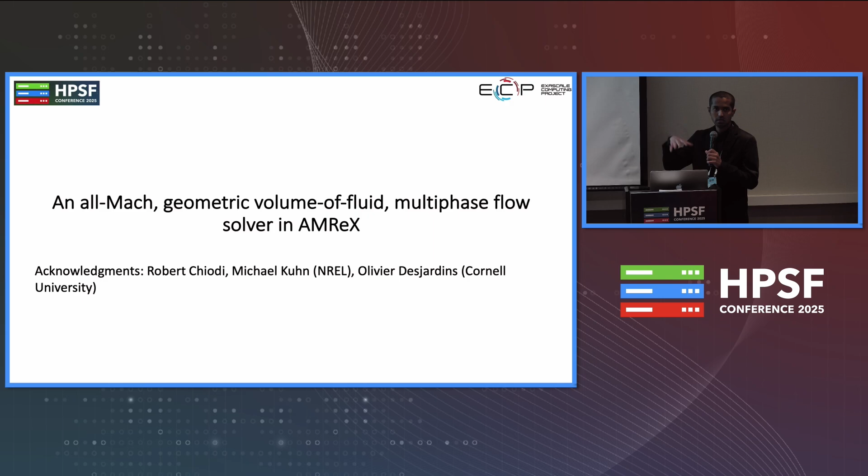So in this part, the numerical methods that you're going to see are not developed by me. It was already existing in their single mesh code framework called NGA. So my work was to interface that code framework into the data structures of AMReX.

So coming to the governing equations, the algorithm used an unsplit geometric VOF, volume of fluid. So geometric means that wherever there is a liquid-gas interface, we create a single plane, very similar to what we have in EB in AMReX, and that is advected passively with the velocity field.

So you have one equation for the volume of fluid transport, which is the first one, and then you have 5 equations for the gas and 5 equations for the liquid. So totally 11 equations are being solved, and we have a stiffened gas equation of state to account for the multiphase nature.

And the interface reconstruction, I'm not going to the details, but it's done through something called PLIC, which stands for piecewise linear interface calculation. So there is a way of determining the normal to the plane by a least squares error reduction method, and that's how you determine the interface.

And we have an all-Mach algorithm, which means that it is going to work on all ranges of Mach number, and it is in the same spirit as any incompressible flow algorithm, in the way that when you do the advection, you do not have the pressure term, and then you bring back the pressure term with a projection step.

And as opposed to an incompressible flow where you have a Poisson equation, you would have a Helmholtz equation for pressure in this case, because the pressure also has a time derivative term. And if you divide by the speed of sound, denoted by c, and make it go to infinity, which is the incompressible limit, you will recover the standard Poisson equation for pressure. And then you have a correction step very similar to incompressible flows.

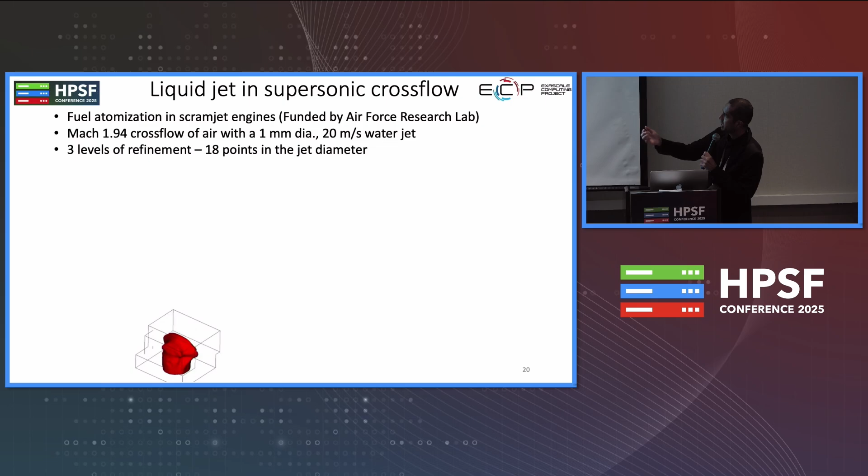So here what you're seeing is there is a Mach 1.94 crossflow of air going from left to right. And there is a fuel jet at 20 meters per second. It's a water jet, so the density ratio is 1:1000. And it's 1 millimeter diameter. And there are 3 levels of refinement above the base level. So that gives about 18 points in the jet diameter.

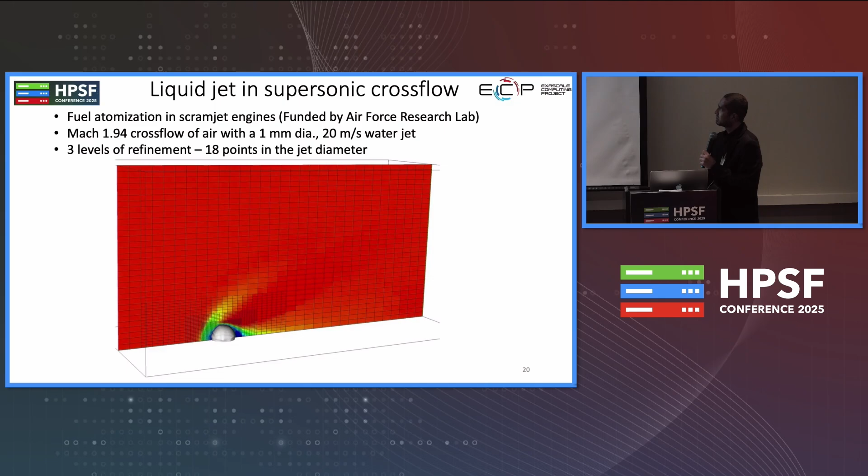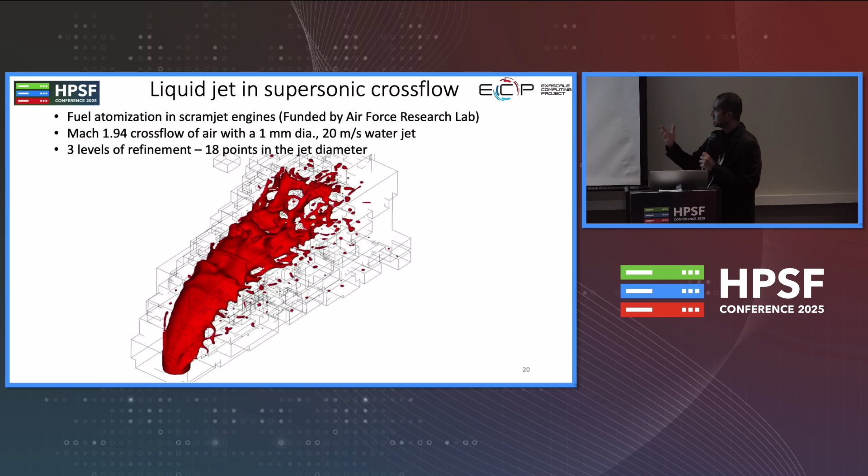I do not have any quantitative comparisons or anything. These are more like qualitative. And it's just to see that the simulation runs in a stable manner. So as you can see, the refinement was based on the interfaces. So wherever there is an interface, I tag them for refinement. And the boxes show the finest level of refinement.

It's also customary to render these simulations in Blender. So here what you are seeing are the actual interface planes. Those planes are exported as STL formats from VisIt, which can be read in Blender and visualized. There's not much scientific value. It's just a nice simulation.

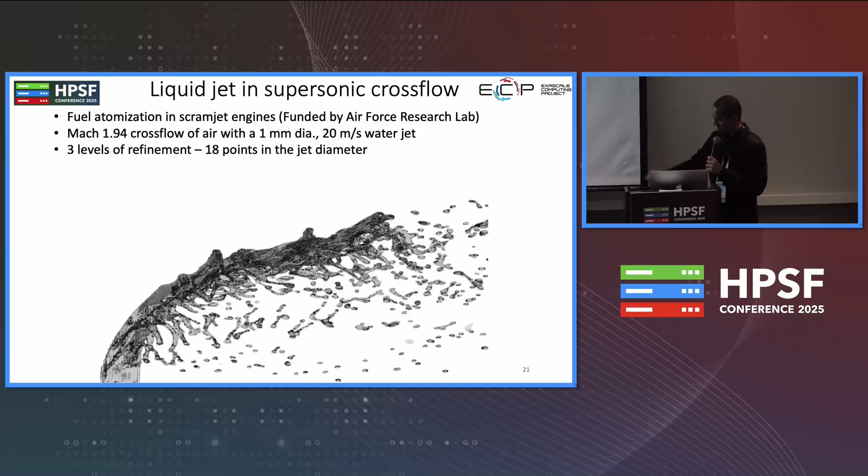The other project that we had was funded by the Office of Naval Research, in which they were looking at atomization using acoustic waves. So they had transverse acoustic waves that create a standing wave pattern when they come from both the left and the right, and they atomize the liquid.

When the liquid jet is aligned with the PAN, although it is a maximum pressure, you do not have any gradient there, and so it might lead to thinning of the jet, but it does not lead to atomization. So you always need some sort of an asymmetry, like what you have at IAN or the velocity antinode. The velocity antinode is having a more symmetric pattern, whereas the intensity antinode has a sort of a bias in atomization towards one side.

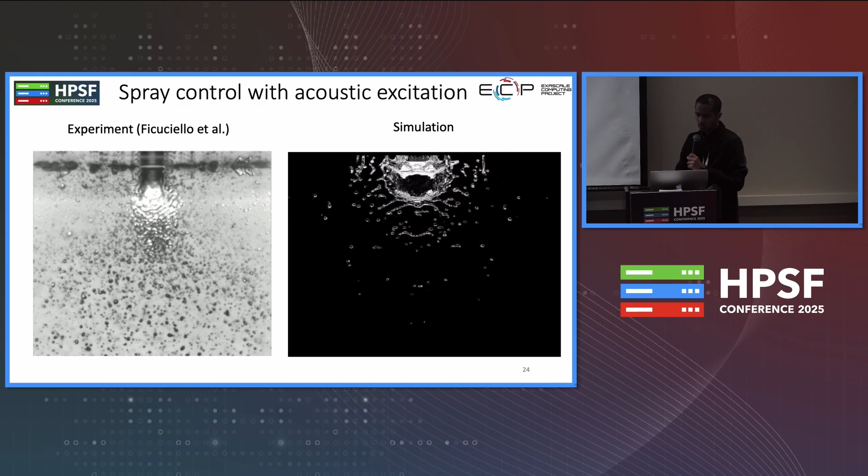And this is another view of the simulation. Again, all qualitative comparisons with the experiment on the left and the simulation rendered in Blender on the right. And this shows a view of the finest level of refinement; there were 3 levels of refinement above the base level.

We also did some studies of scalability of bubble collapse in supersonic flow on the Stampede, now obsolete Knights Landing nodes. And it was a decent scaling with AMR, and the resource usage was reduced by about 50% with adaptive mesh refinement of 3 levels with a 64 cube mesh.

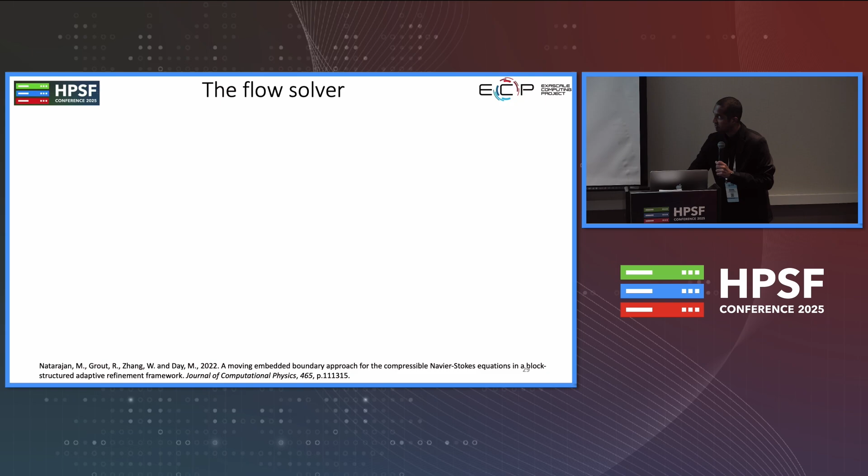And the next part is the work I did at NREL, thanks to my co-authors, Ray, Weiqun, and Marc. And this is on implementation of a moving embedded boundary algorithm within the CNS framework, which is the Compressible Navier-Stokes framework in AMReX. So the CNS framework has an existing capability of doing simulations with compressible flow and static bodies. So that was extended to doing moving geometries.

And it has a Godunov-based semi-analytic Riemann solver with van Leer limiting of the fluxes. It has second-order accuracy, and the small cell issue was treated with the flux redistribution technique. And because this is an explicit solver, it does not have the issues that Deepak was mentioning in the morning related to solver convergence, like the nodal Poisson convergence or anything of that sort.

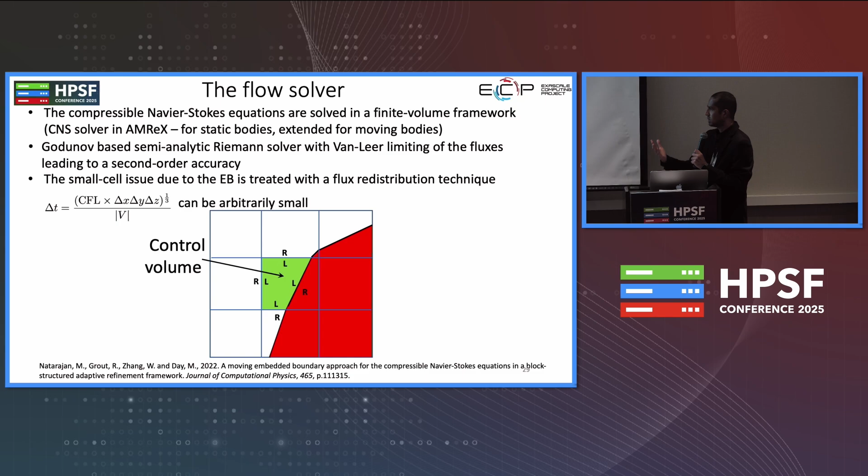So here, I'm not going into the details of how the fluxes were formed, but the idea is that at every face, even at the EB face, you have a left state and a right state, and that's given to a Riemann solver, and that returns you the fluxes at the EB face. So to do a moving EB, the state inside the EB was modified in a certain way so as to account for the moving boundary condition.

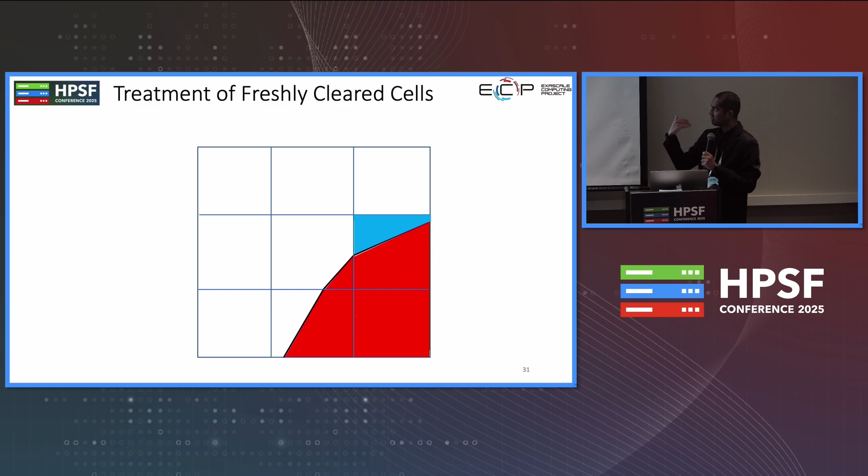And one main thing that has to be handled is what are called freshly cleared cells, which means that when an EB is moving, you have cells which were previously solid and suddenly they become a cut cell or a fluid cell, which does not have any history of fluid data. So you have to do some sort of an interpolation. So we do interpolation from the valid cells, which are the cut cells or the fluid cells, in a 3x3 neighborhood, and it is a volume weighted average.

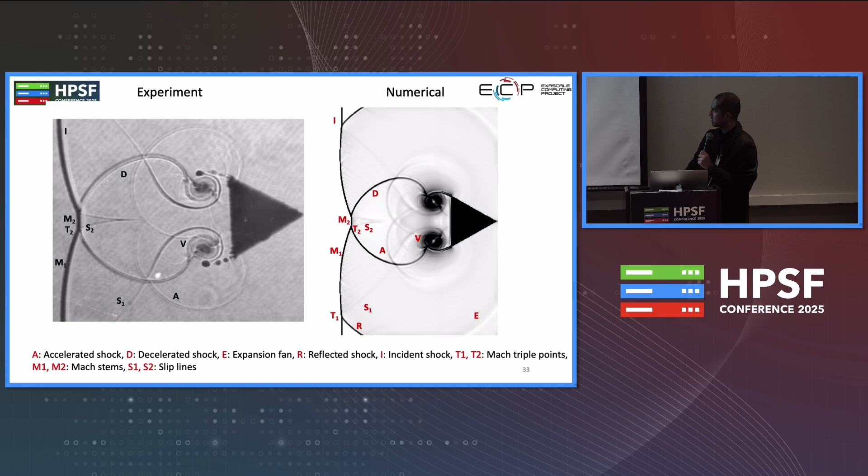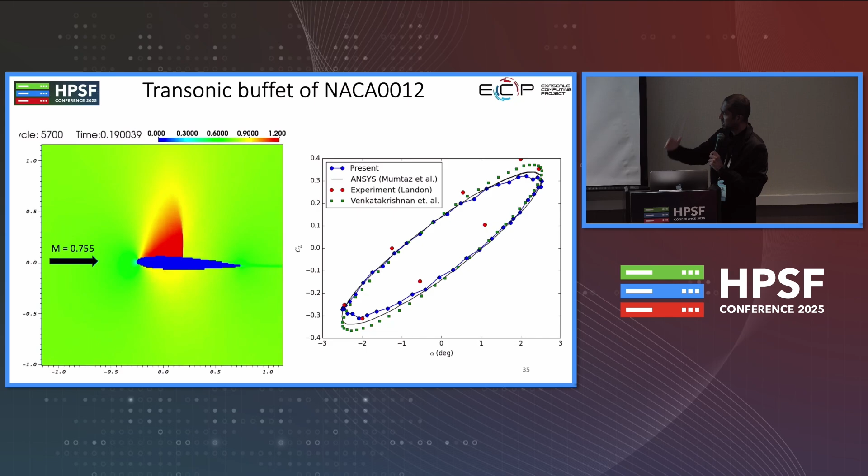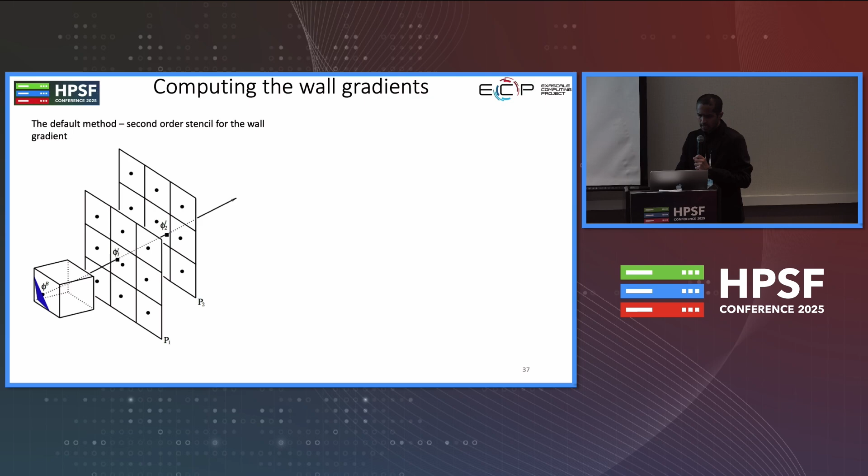And another thing that we had done was to implement a better method for computing the viscous gradients on the surface of the EB. The classic method consists of a 3-point method to find the gradients along a line normal to the EB, and we replaced that with a 3rd-order least squares method, which is also now there in AMReX Hydro.

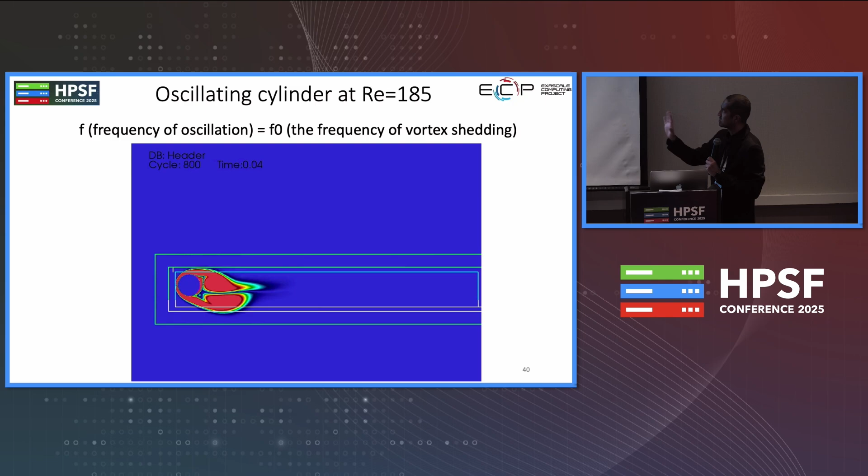To do this, I had an implementation of that within the CNS solver, which used LAPACK to solve the 9x9 matrix system, and it's a pointwise matrix system, so that's pretty fast. And we did a bunch of test cases to verify that.

So this is one of the cases where there is an oscillating cylinder with a frequency of oscillation the same as the vortex shedding frequency, and we have some comparisons of the coefficient of pressure with some experimental data, which is shown in symbols, and also the skin friction coefficient at 2 different frequencies of oscillation.

And I'll stop with my simulation with the AMReX logo represented as a moving embedded geometry with 4 levels of refinement, 3 levels of refinement above the base level. So yeah, I'll take questions.

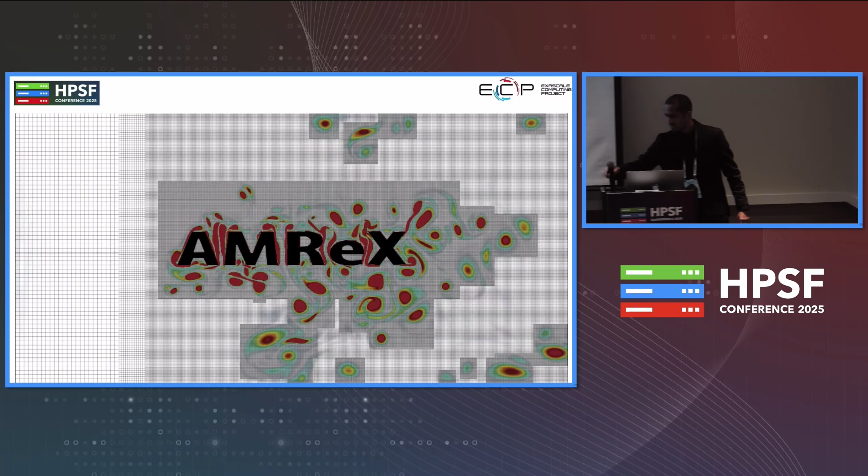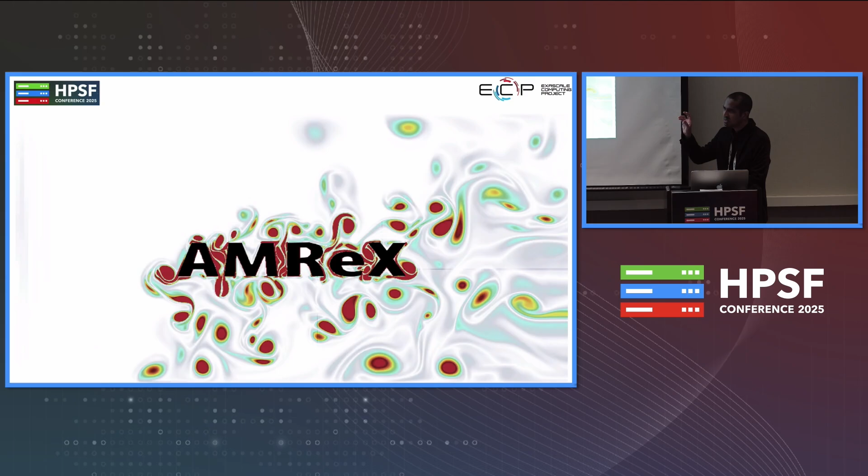The multiphase stuff at the beginning, you included surface tension? Their code had it, but no, I have not included surface tension. That was some extra things that I had to do. But the cases I was trying were high Weber number, so the surface tension is not really important in the breakup that you are seeing in those cases. Right? High Weber number. Okay, I forgot if it is in the denominator. Yeah, that's right.

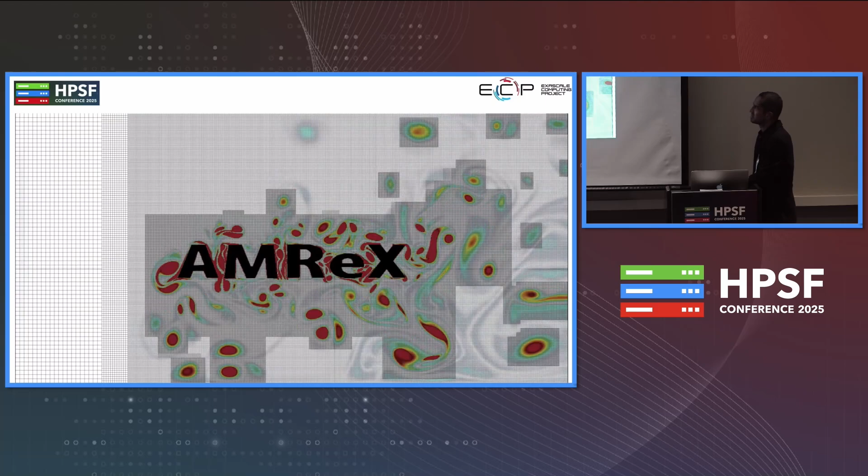For the multiphase stuff, from the results we see that the jet breaks up into small particles. But what happens when the particle size becomes smaller than the grid itself? Does it conserve mass? Does it dissipate? So in the simulation that I showed, there was only one plane in each cell where there's an interface. Rob, the developer of the library that I took, had developed a method where you can have multiple planes within a given cell. So that will give you subcell resolution.

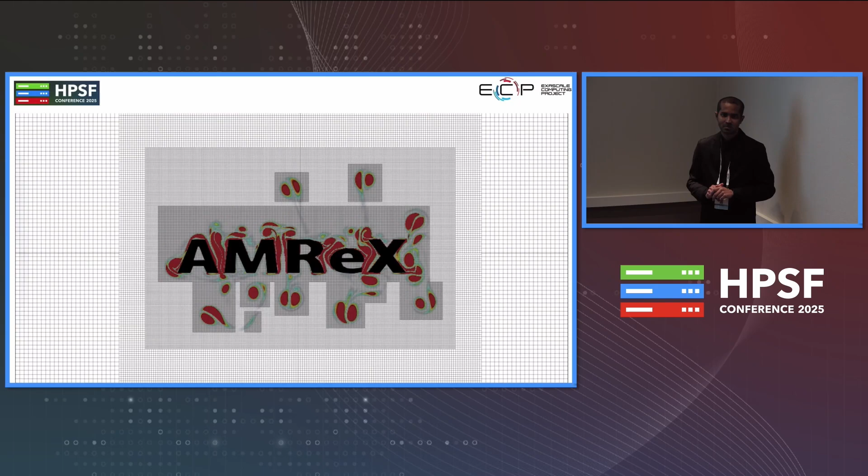So that was the resolution that they found, that we need to have 2 or even 3 planes in a cell to have that sort of resolution. So the mass is always conserved? It is. But in these simulations, if you want to resolve that droplet, you need to have a finer mesh because there are no multiple planes. So you could capture very thin sheets and get some very interesting things.

I wish I knew all about it. Oh, yeah. I have one more question actually.

The EB stuff: there's an issue of freshly cleared cells where a new cell opens up, when you interpolate. But there's also an issue of when the cell goes from fluid to solid. So what happens to the mass? I do not do anything. I presented this and we were talking about that; they said we probably should account for that as well. I do not do closing of a cell. You have to push that mass into the neighbors. I do not do anything, but got reasonable quantitative comparisons with all three things.

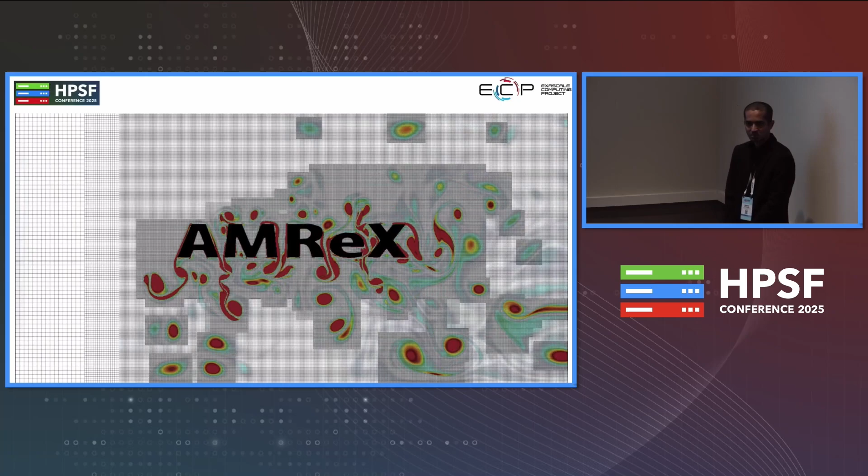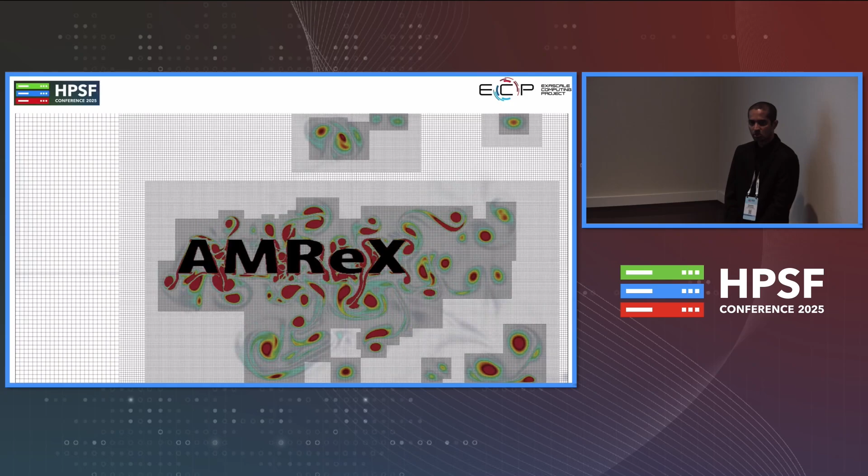Have you found anything different? Yeah, it matters when we have supersonic flows and such things, because of the mass resolution. Maybe I've not encountered those things. These are probably much simpler compared to that. Yeah.

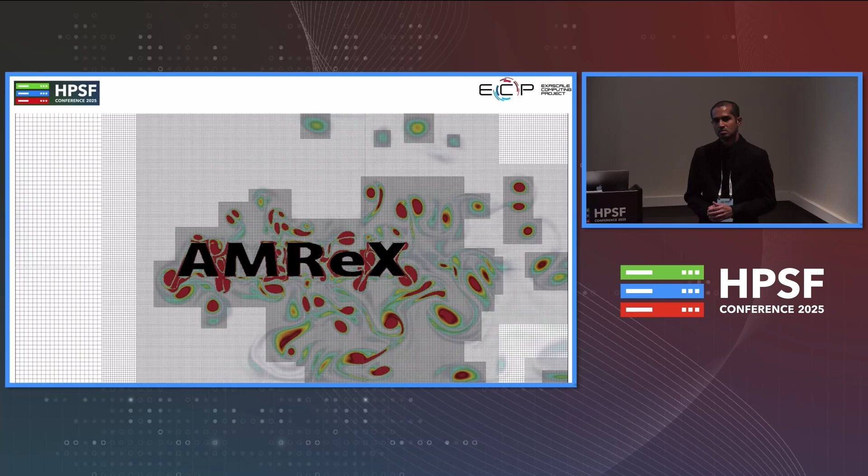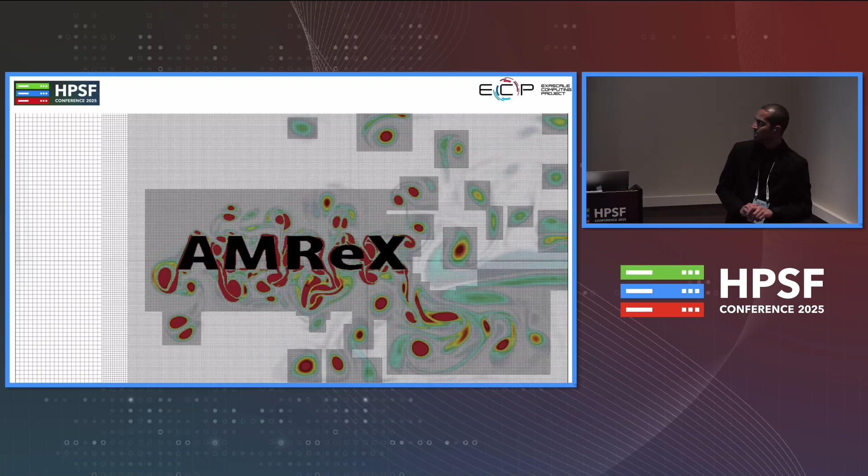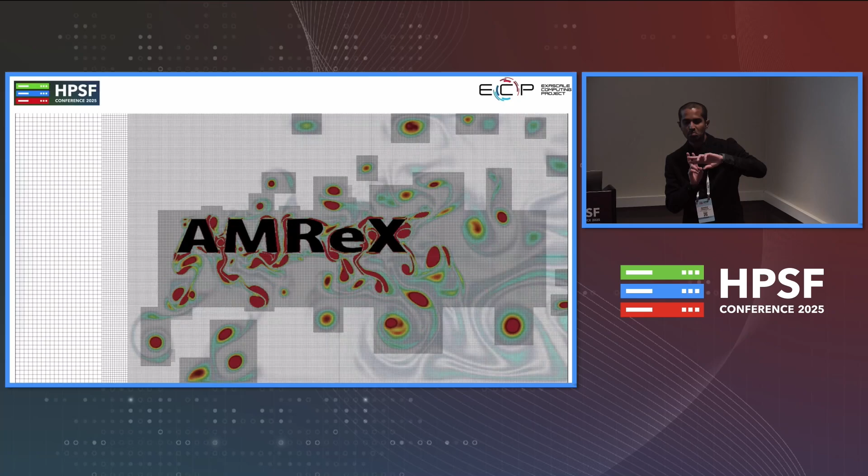No. So for all of these, the answer is no. All of these were within the AMReX framework at the time when it was C++ and Fortran. So these are not GPU as well. The only problematic thing is that you need to have enough ghost cells, because you are backtracing a particular cell, and you cannot go past the number of ghost cells that you have. So that is the only thing you actually need to have.

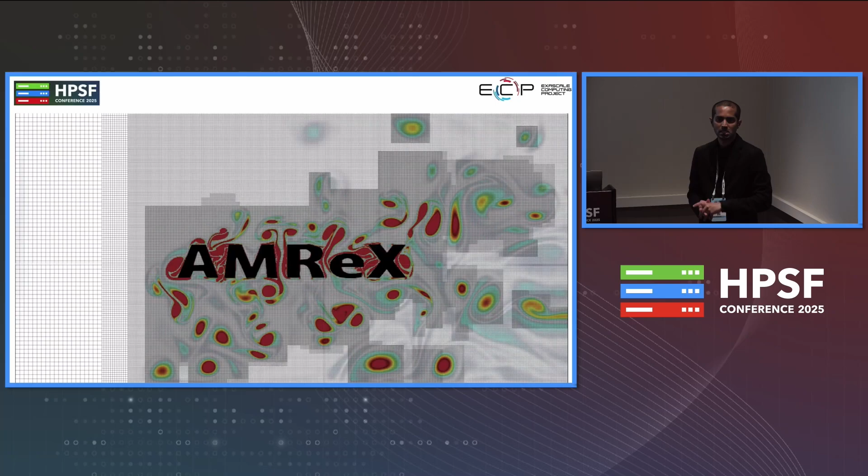Is there anything that you find particularly challenging in GPU? Oh, I haven't tried this. No problem.